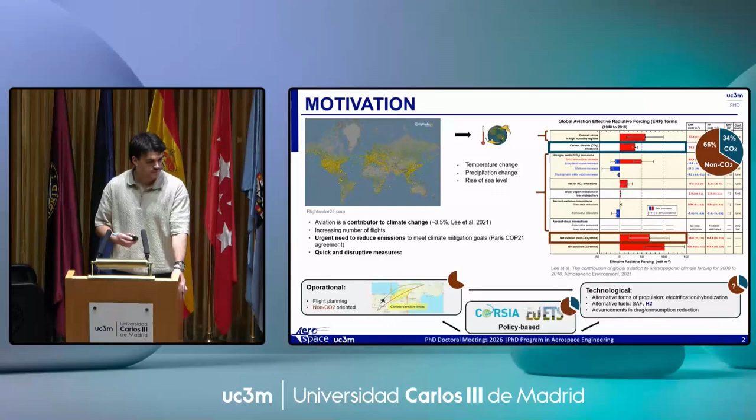So with that and an increasing traffic demand, there is the urgent need to have quick and disruptive measures that, as explained before, we can divide into three blocks. First one, operational, more focused on non-CO2 emissions. Secondly, technological, changing forms of propulsion, forms of fuels, and also advancements in drag and consumption rates. And above both of them, policy-based, basically rewarding or penalizing good and bad practices.

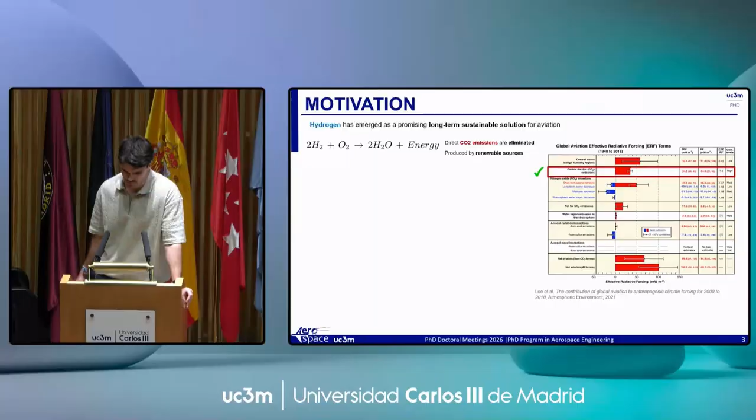So among all of these, hydrogen has emerged as a long-term sustainable solution for aviation, where we directly eliminate CO2 emissions, and it can also be produced by renewable sources. On the other hand, what happens with non-CO2? We have problems here because we have an increase in water vapor and also a potential increase in contrails that can play an equally or even larger noxious role to the environment. And also, we still have a big uncertainty about the NOx emissions that a hydrogen engine can produce.

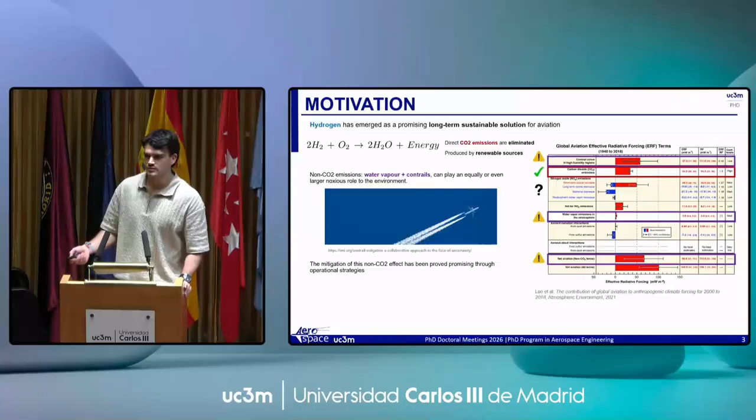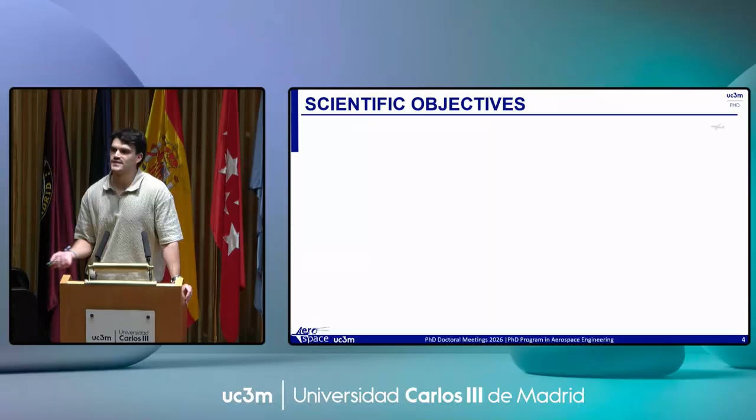Good part is that the mitigation of these effects has been proved promising through operational strategies, such as presented before. They have a strong dependency on location, so we can reroute the aircraft in order to avoid it. So basically, this thesis was born with the idea of joining the research and design of the hydrogen aircraft with the operational trajectory study to round off the problem, tackling both CO2 and non-CO2 effects.

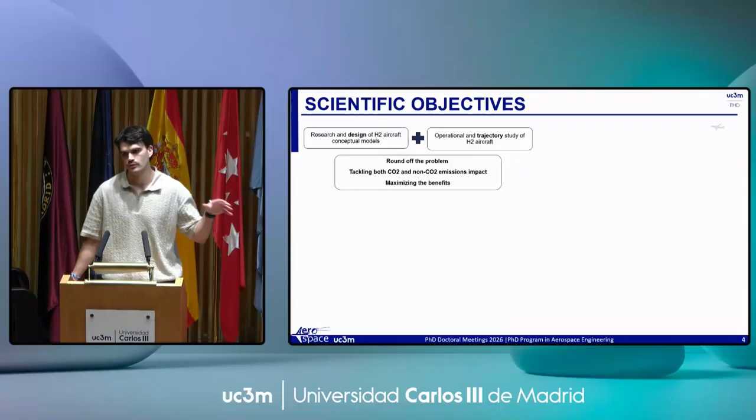So this would be the scheme of this thesis, joining hydrogen aircraft design optimization with optimal trajectory planning, with the general objective to analyze the introduction of this hydrogen aircraft, quantifying its climate impact reduction potential and derived cost, with the sub-objectives of developing aircraft design analysis and optimization models, and also climate optimal trajectory planning algorithms for the hydrogen aircraft, with the relevant research questions that I will develop later in each of the blocks.

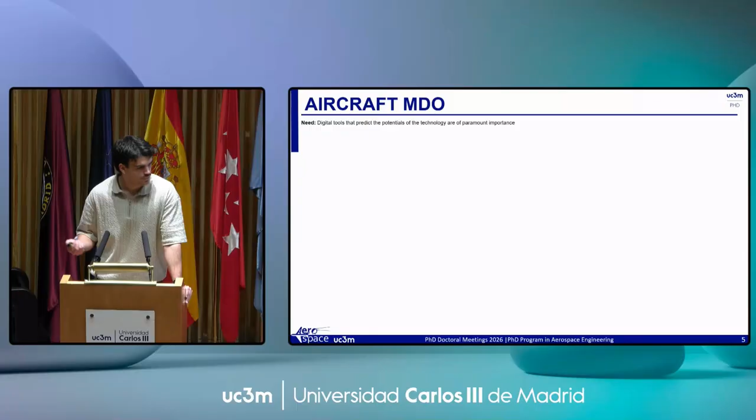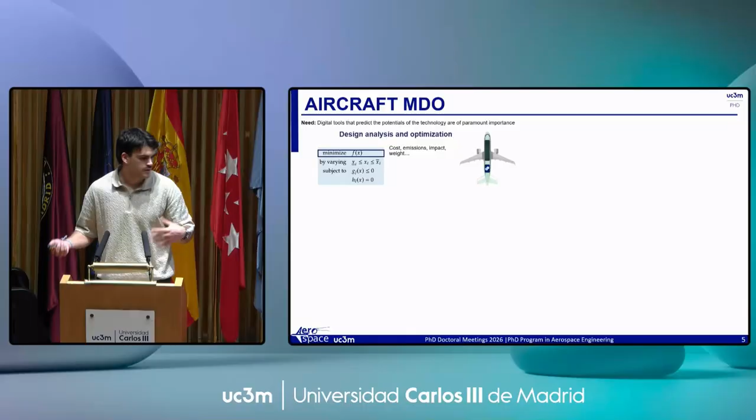So, starting from the design, the MDO, the multidisciplinary design optimization, it is clear that we need digital tools to predict the potential of this new technology, and here is where design analysis and optimization come into play. It's basically transforming the design problem into an optimization problem with an objective function to minimize, varying the design variables that are characteristics related to the plane, and with some constraints like fulfilling a mission.

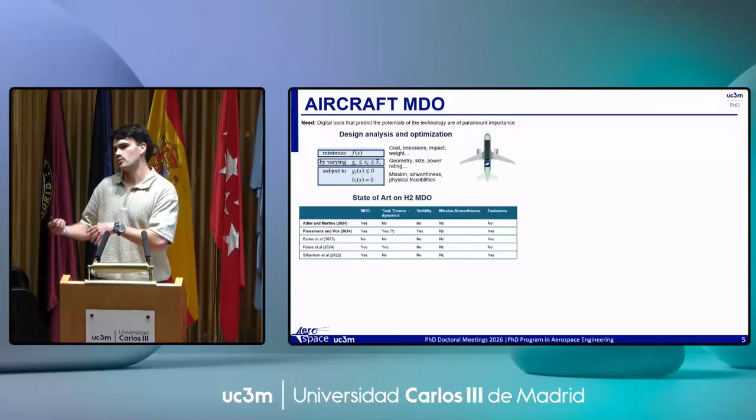If we go through the state of the art of hydrogen aircraft multidisciplinary design optimization, we found a bunch of works, each of them from different perspectives, that lack a holistic view or a comprehensive work of the whole aircraft with all the subsystems and also quantifying its impact or emissions. So we found the need to understand the impact of the mission objective on the design, basically the main drivers of design, and also to be able to measure the capabilities of this aircraft under different conditions.

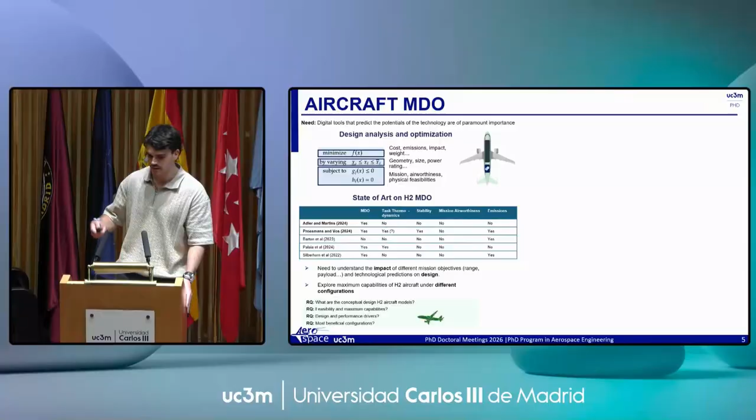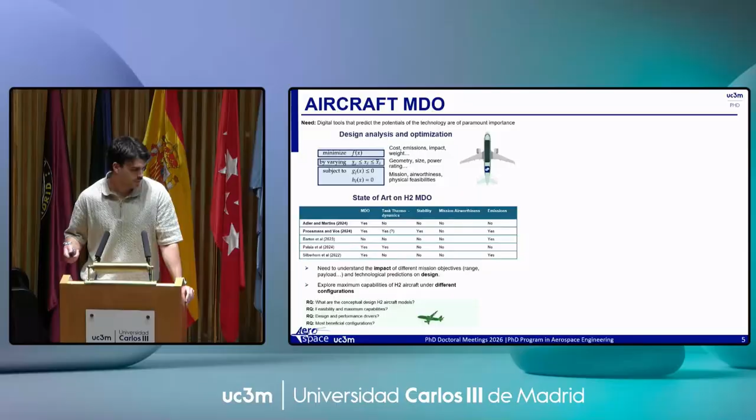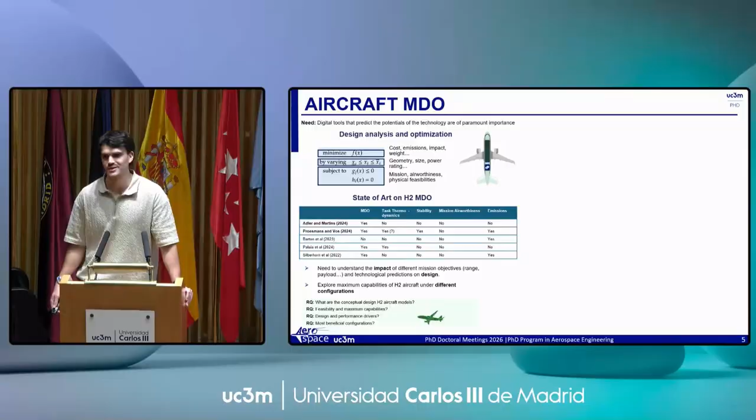So basically trying to answer the questions of what are these conceptual design hydrogen aircraft models, what is their feasibility and maximum capabilities, which are their design and performance drivers, and what are their most beneficial configurations.

We're trying to answer all of this in all the work that I've been doing last year, also already presented in these doctoral meetings, that we wrap up in this paper, already sent to the Journal of Aircraft, where we compare this conceptual hydrogen design against a conventional kerosene reference, measuring its feasibility and capabilities, also these main design and performance drivers, with a quantification of impact and cost. I'm going to skip these results for today.

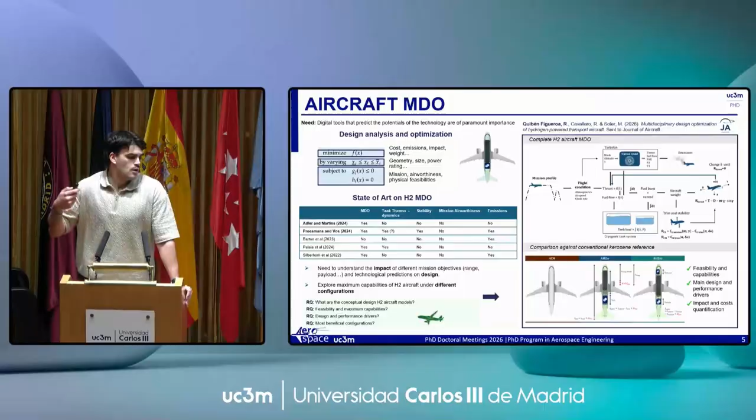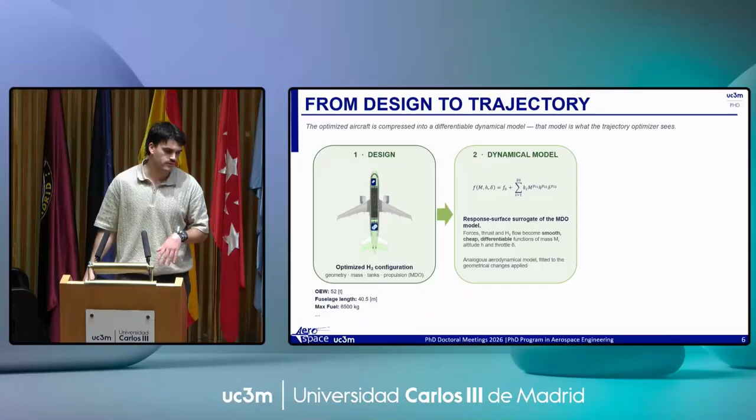So with these results, we jump now into the trajectory optimization part, and for that, we need to transform these aircraft models, these aircraft candidates, into dynamical models. So basically, into smooth, cheap, and differentiable functions that can be embedded in a trajectory optimization problem, in this case, in point mass dynamics, a trajectory optimization problem that can be formulated as this, again, with an objective function, with these point mass dynamics, and with the path and state constraints.

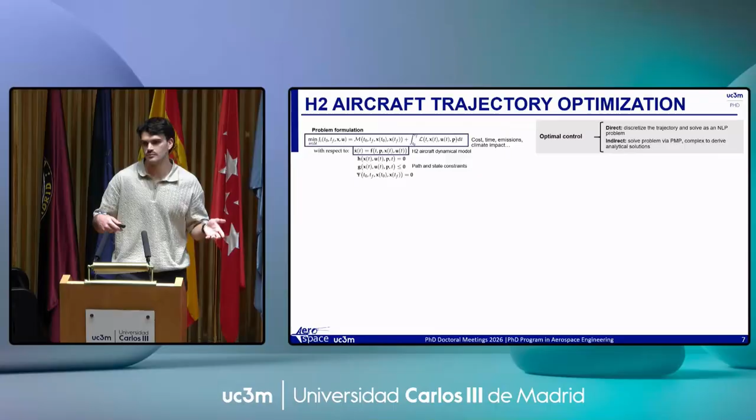So if we go now again into the climate... So at the time of solving this problem, we have different methodologies that can be through optimal control solutions, direct and indirect methods, and also non-optimal control ones that could be metaheuristic, gradient-based, nonlinear programming, or mathematical programming.

So if we go now, again, into the state of the art of climate-optimal trajectory optimization, as Omar presented before, we also lack work here related to hydrogen aircraft that has not been done yet. So to cover this gap, we propose here 2 studies.

The first one is solved through the indirect solution via the Pontryagin maximum principle. This is more focused on a theoretical approach to solve canonical problems and to be able to understand the optimal operating conditions of this aircraft. Basically this part is focused more on the influence on performance, more qualitative than quantitative.

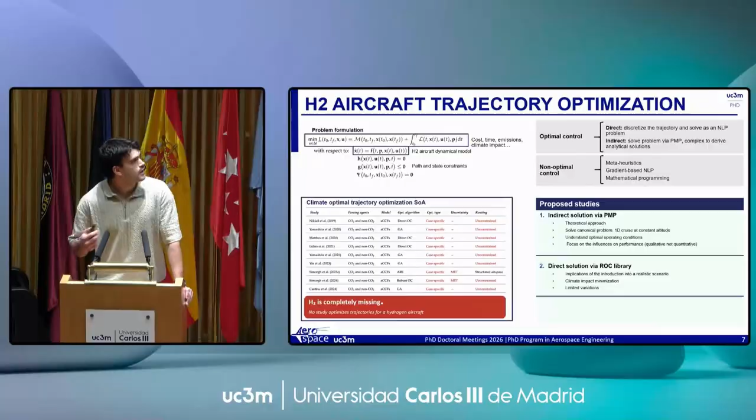And a second study directly using our in-house library for free routing trajectory optimization in a more realistic study where we also include the climate impact. These 2 studies come with the purpose of answering the research questions: which are the optimal operational flying conditions and which are the optimal climate routes for this hydrogen aircraft.

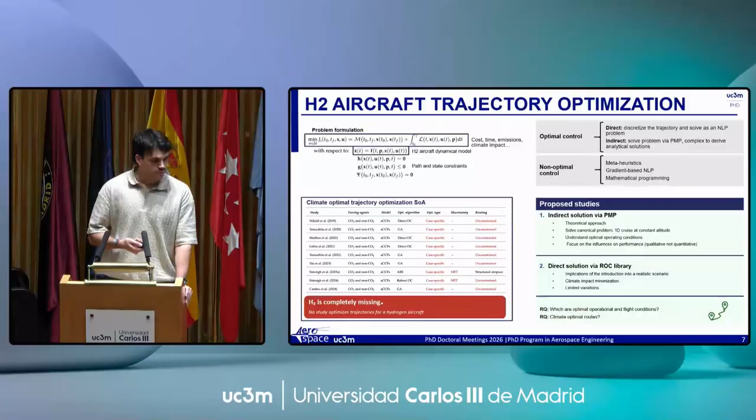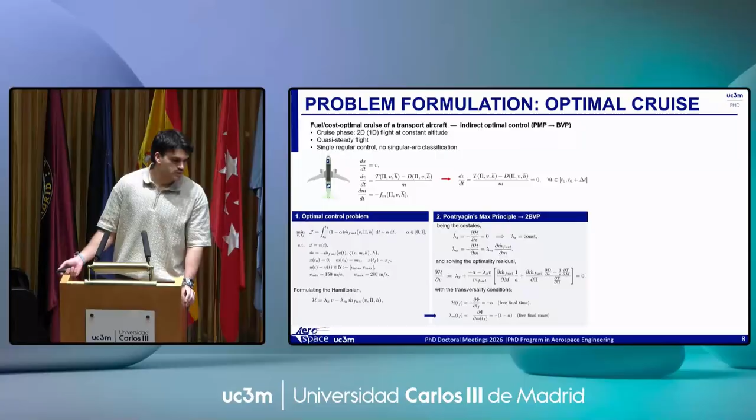So for the first study, we do a fuel cost optimal cruise for a transport aircraft. This is a 1D cruise flight with constant altitude where we assume a quasi-steady flight, meaning that we don't have acceleration. And we can formulate the problem as this one, again with the reduced dynamics and with the velocity as the control. We use here the Pontryagin maximum principle to reduce the problem to a 2-point boundary value problem, to which we add altitude as a design variable.

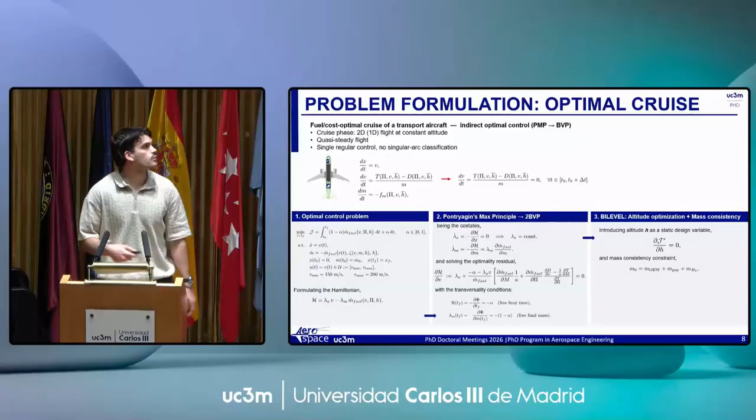So we want to know the optimal altitude to perform this cruise, and we also add the mass consistency. So we end up with this 3 constraints and 4 design variable optimization problem that we are going to solve. This will be the solution for the fuel optimal cruise, just caring about the consumption, not the time. And this will be at 4 different ranges, the solution for the hydrogen aircraft at 5 different payloads.

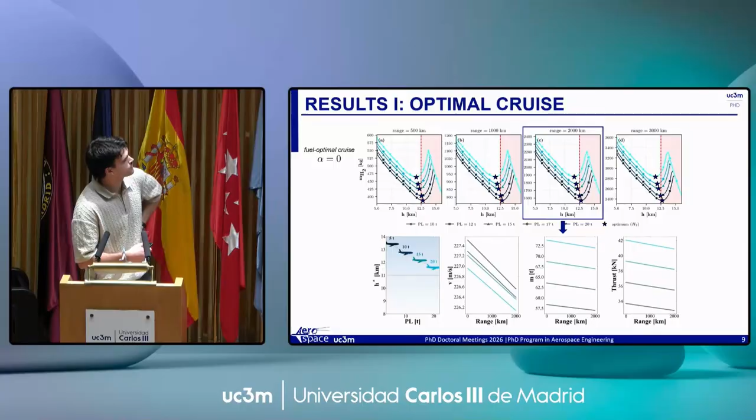So solving the PMP and the mass consistency constraint, we get the different solutions in terms of consumed hydrogen or consumed fuel. As you can see in the stars, this would be the optimal altitude of each of these conditions, and we can also see the trajectory profile, how it evolves, the optimal altitude as we increase the payload, and also the velocity, thrust and mass evolution.

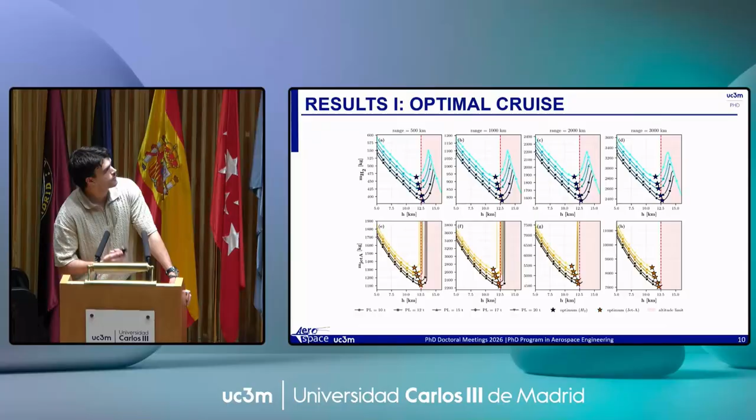What we are really interested in here is to compare this against the kerosene or conventional aircraft to see how this optimal solution evolved. So to give you some highlights of these results, we can compare the optimal altitude. In this case, we achieve between 300 and 600 meters of difference in this optimal altitude. That is 1 flight level that could be of potential help in the future when segregating traffic.

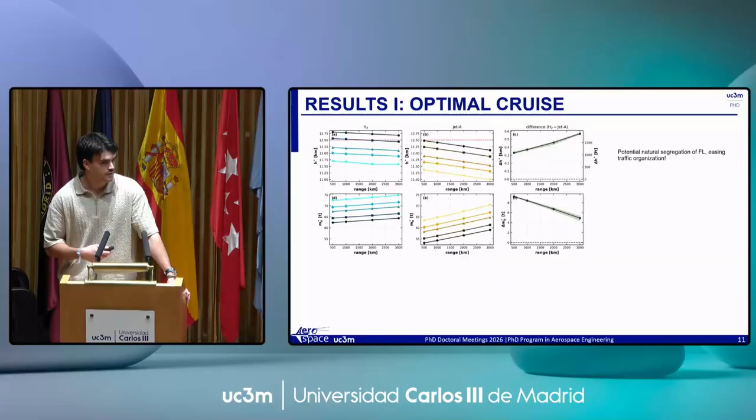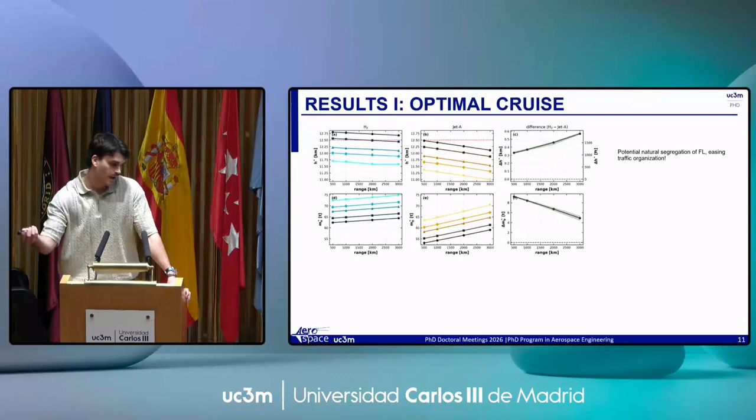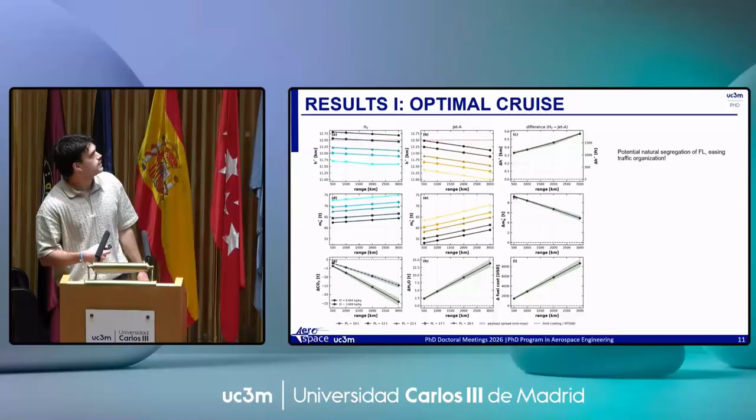We also have here the difference in the initial mass. As you can see, the increase for hydrogen is up to more than 8 tons. That is reduced when increasing the range due to its higher efficiency. And in terms of emissions and cost, we can see the reduction in carbon dioxide depending on the manufacturing method of the hydrogen. Obviously the increasing water vapor and increasing cost, assuming the cost of producing or getting both of the fuels.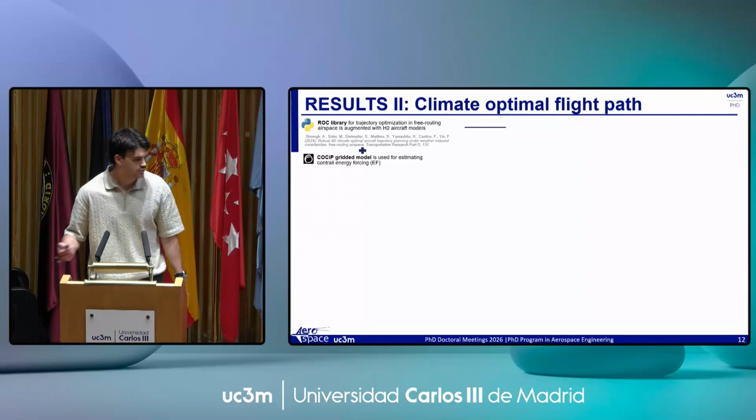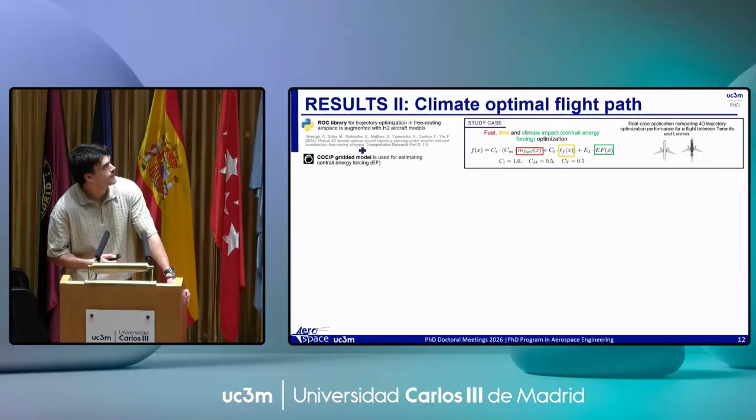For the second study, in this case, we use the in-house library for free routing trajectory optimization, joined with the CoCiP grid model for estimating the energy forcing of the potential contrails. In this study case of a 4D trajectory between Tenerife and London, the objective function has 3 objectives: fuel, time, and climate impact in terms of contrail energy forcing. So this would be the solutions.

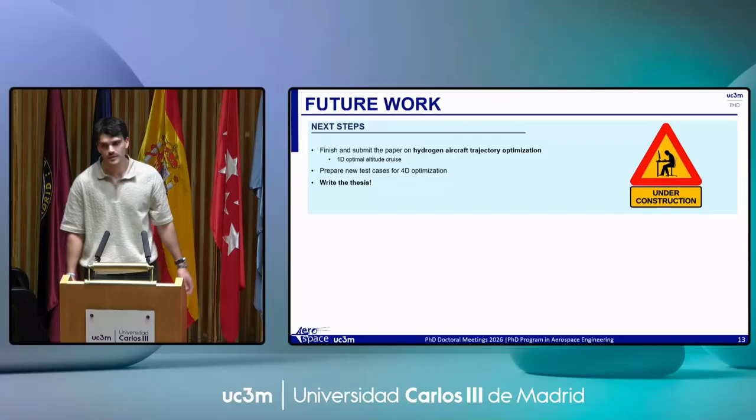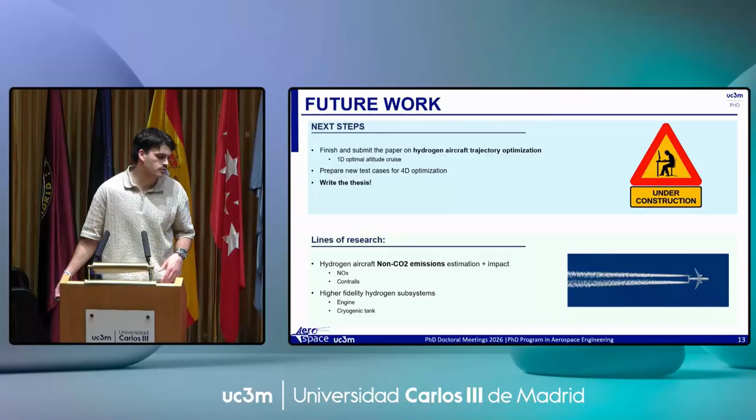With that, I'm finished. As future work, it would be to wrap up all this hydrogen aircraft trajectory optimization work into one paper and basically write my thesis. As future research lines, we need more research and development on non-CO2 emissions related to the hydrogen aircraft, and also it would be great to have high fidelity or validated models for the hydrogen subsystems such as the engine and the cryogenic tank.